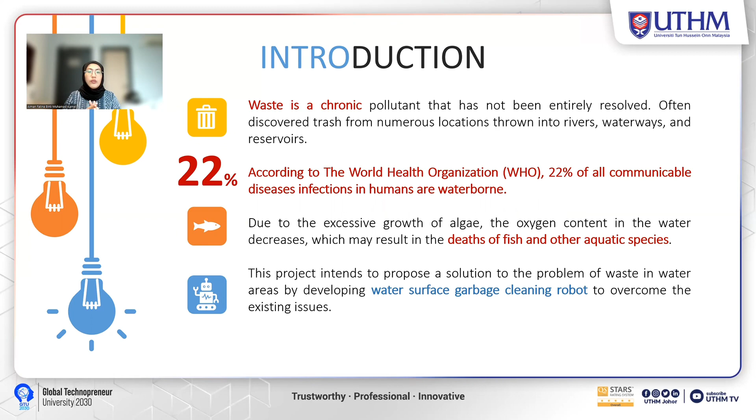So this project intends to propose a solution to the problem of waste in water areas by developing a water surface garbage cleaning robot to overcome this existing issue. For the problem statement, the first one is waste is one of the major causes of water pollution. The second one, high cost and high risk to use manpower.

According to the Straits Times, over 6.5 million were spent by the Malaysian government to remove pollutants from Sungai Kim Kim, where chemicals were illegally dumped. Also, according to Miss Marisa Perry, one of the volunteers for Econites, the Department of Irrigation and Drainage, DID, spent over 5,000 ringgit every month to collect and dispose of the rubbish. This is because they use

manpower. The third one, most robots use battery. And the fourth one is to increase the operation hours by integrating a PV panel. The objective is first to design a small scale water surface garbage cleaning robot. The second one is to develop the prototype of the robot. And the third one is to increase the operation hours of the system with an integrated photovoltaic system.

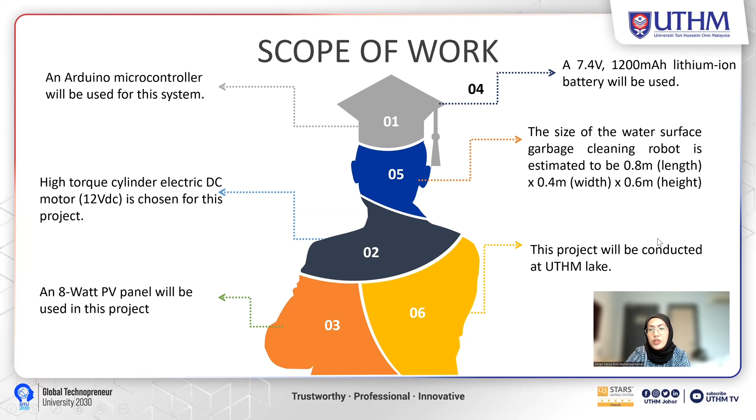For the scope of work, first we use an Arduino microcontroller, a 12 VDC motor, one PV panel, and a lithium battery. The estimated size for the robot is 0.8 meter length, 0.4 meter wide, and 0.6 meter height. This project will be conducted in the UTHM lake.

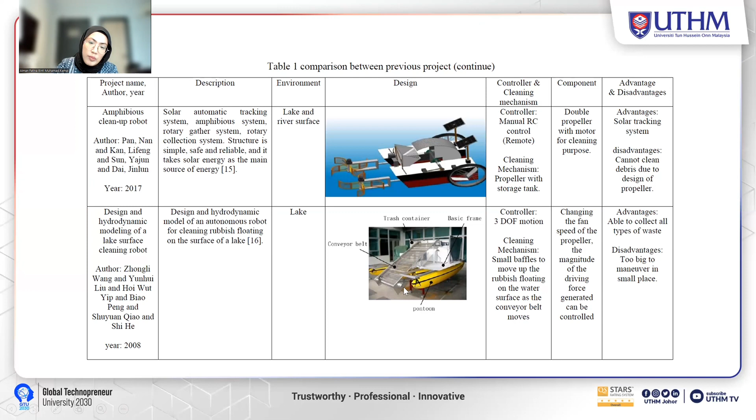Over here. The fourth one is design and hydrodynamic modeling of a lake surface cleaning robot. This is the same as the first prototype, which has a conveyor belt and a storage tank, but this structure is more stable, has a better chassis, and has a bigger space over here than the first one.

The two robots are actually the same, but this one is a modified one. It is modified with the YOLO V3 detection method. This part is using a robotic arm. The cleaning mechanism uses a robotic arm and a storage tank also.

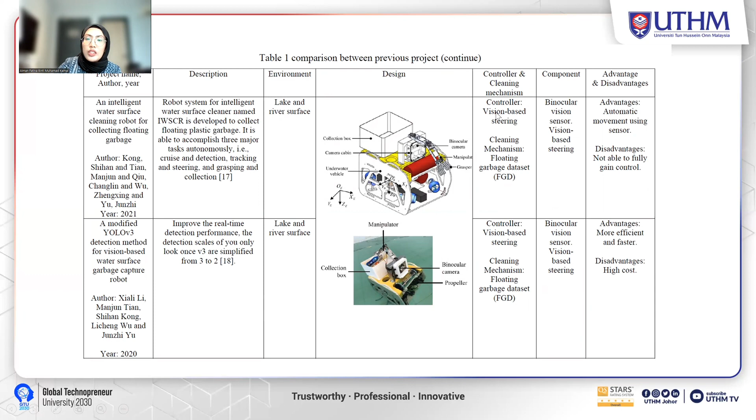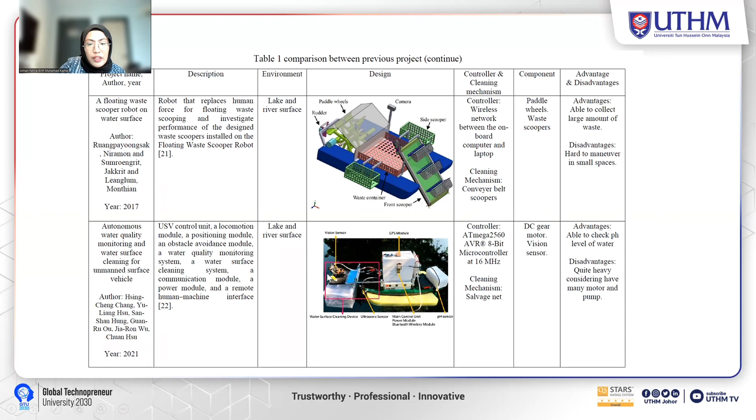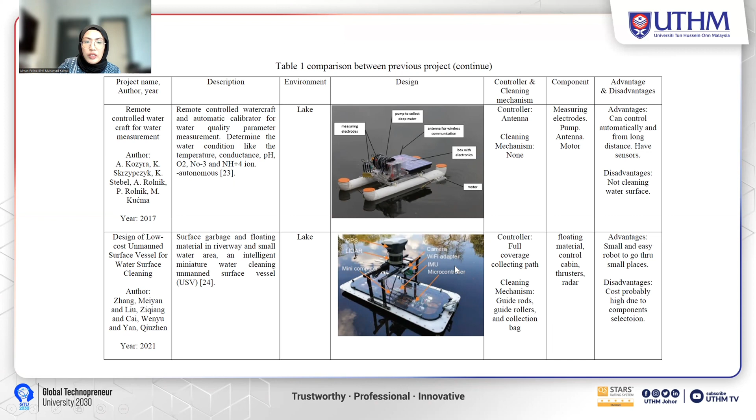Next, this is a remote control watercraft for water measurement. This is like the second prototype, which is used to monitor the water quality. There's no cleaning mechanism and the controller uses an antenna. And then this is a design of a low-cost unmanned surface vessel for water surface cleaning. The controller is full coverage collecting path, and the cleaning mechanism is a guided roller and collecting bag over here.

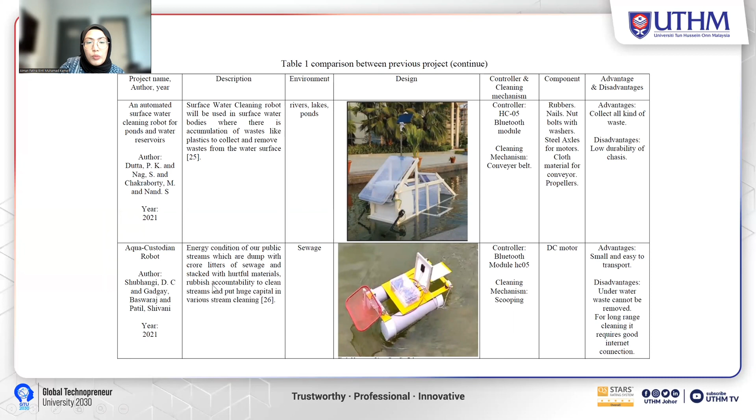And then this one is an automated surface water cleaning robot for ponds and water reservoirs. The controller is a Bluetooth module. Then the cleaning mechanism also uses, like prototype one, a conveyor belt. And then the last one is the aqua custodian robot, like this. This uses a scooping method.

For software requirements, first, I use Microsoft Word to do my report. The second one, I use Google SketchUp to design the robot. The third one is using Arduino IDE for the coding of the DC motor. And then the fourth one is Microsoft PowerPoint, first to do the circuit connection, and second to do this presentation.

For the upcoming project software requirements, I will use Fritzing. This will be more proper to construct the circuit. The second one, maybe using Proteus for simulation before the troubleshooting of the motor and robot. And the last one is Microsoft Project for a more proper Gantt chart.

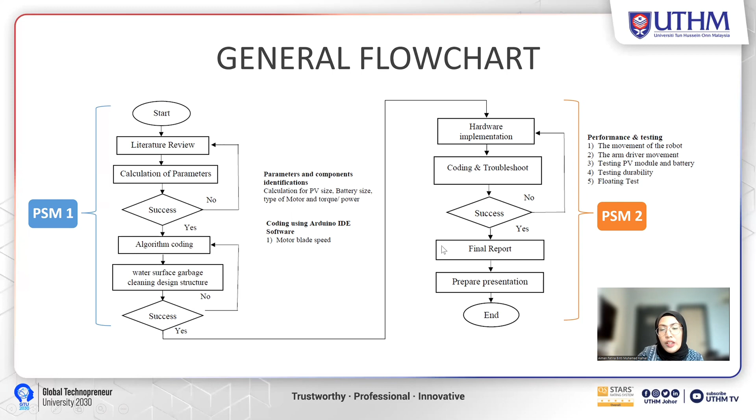For the methodology, this is my general flow chart. This is my current project, where I have already done the literature review, the calculation of parameters, the algorithm coding for DC motor speed, and lastly, the design of the structure of the robot. For PSM2, I will do the hardware implementation, coding and troubleshooting, and then the final report and presentation. So the main tasks I have done are the calculation, the coding, and the design. For PSM2 it will be the development, testing and troubleshooting.

For the calculation, first we need to determine the total weight, force, and average speed, so we can find the suitable components for the robot. First, the robot is estimated to be 6 kilograms, and the load the robot can carry is estimated at 1.5 kilograms, or 15 Newtons. The average speed of the robot is 0.5 meters per second.

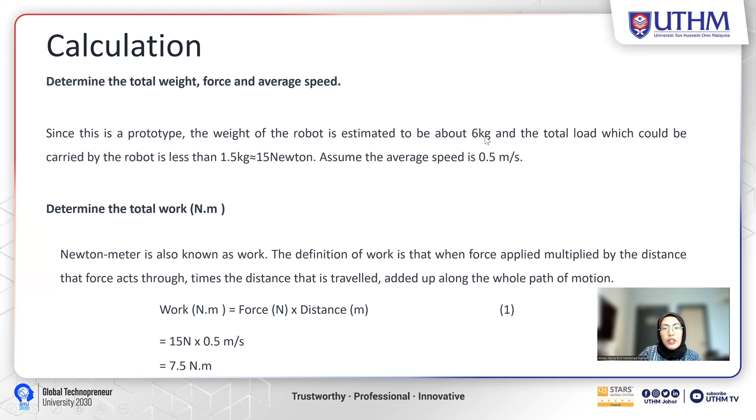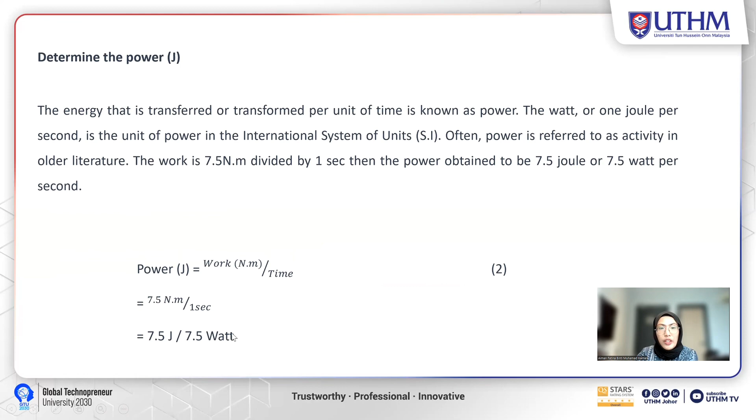So first we need to determine the total work. When we multiply 15 Newtons by the average speed, we get a total work of 7.5 Nm, and with that we can calculate the power. The power is work divided by time, which is 1 second, so we get 7.5 watts. For the PV panel, we use monocrystalline, because it has 20% efficiency.

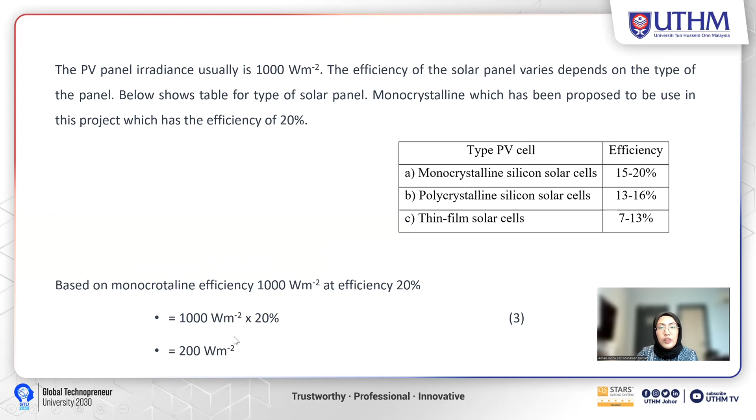So based on the irradiance, 1,000 irradiance times the 20% efficiency, we will get 200. And then next, the area for the PV panel to produce 8 watts. By doing the past calculation, we will get this 200 times area, we will get 8 watts. So how to find area? This is mathematical, so we will get 0.04 meter squared.

So surface area for the PV panel, which is the upper part of our robot, the top part. So the width times length equals area. So 0.1 times 0.4 meter equals 0.04, which is over here. So this is our surface area that we can put the solar panel and can produce 8 watts.

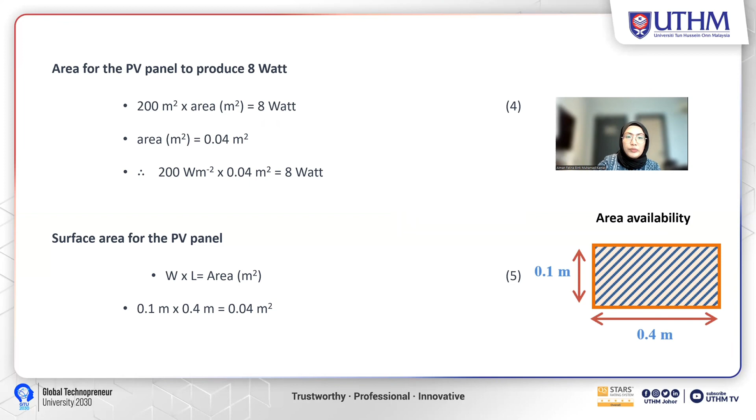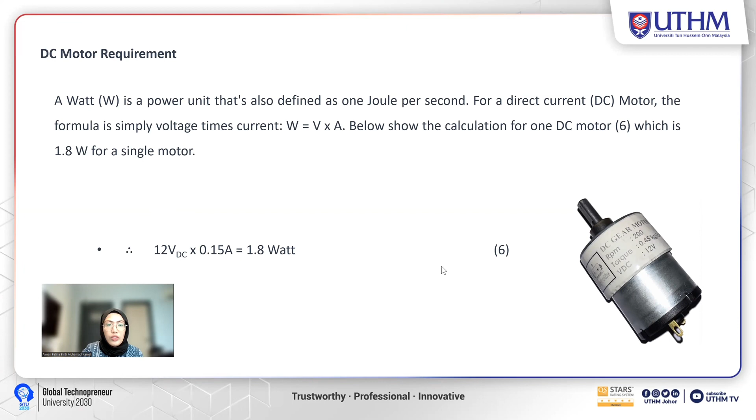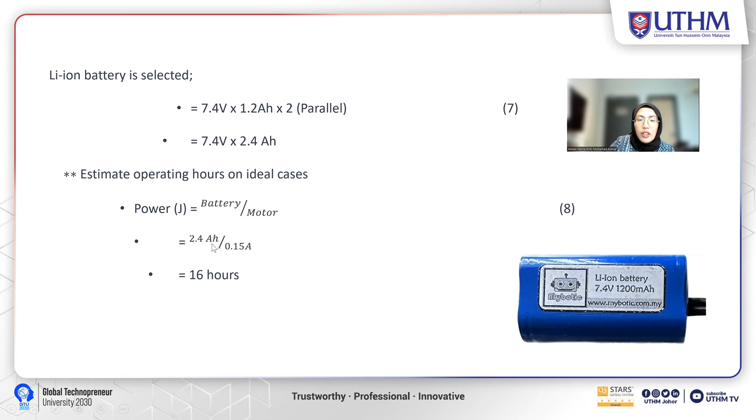So for the DC motor requirement, we gain this from the data sheet, which is 1.8 watts per motor. For the battery, we select a lithium battery. We use 2 batteries and put them in parallel, so we will get 2.4 Ah capacity. So estimate operating hours in ideal cases: we calculate it as battery divided by motor. This is from the data sheet, 0.15 amps. So we will get 16 hours.

For the motor to move forward, backward, left, and right, a motor driver is required. This project selected a 12V DC gear high torque motor because it has high torque and can support 0.5 kg of weight per motor. The project weight is 1.5 kg, but because it is aqua based, its weight will be less than it is on land.

So the driver is a dual H bridge motor driver which allows speed and direction control of 2 DC motors at the same time. The driver can drive DC motors that have voltage between 5 and 35 volts, and the driver has 2 amps current per output.

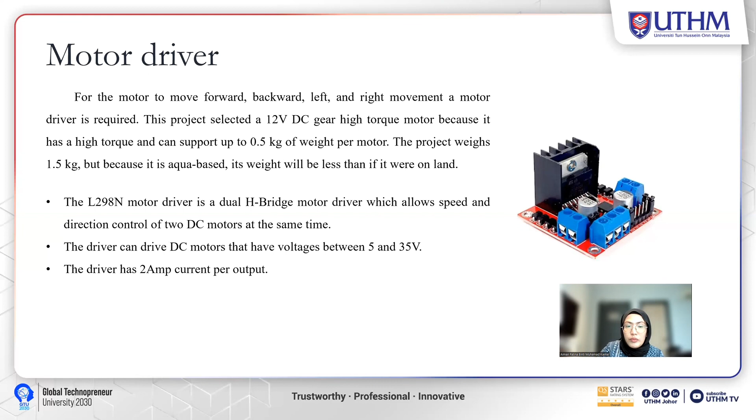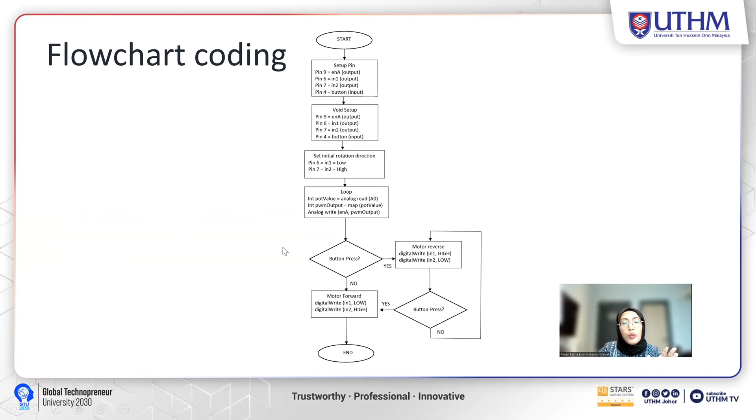Okay, this is the flowchart of the coding for DC motor speed. First we set up the pin. Then we set the output and input, and then we set the initial rotation direction, which is to move forward. Then we set the initial value for the potentiometer, which can go fast, medium, low. And then we also set the button. When we press the button, the motor will go reverse, and if we press it again, it will go forward.

So the design idea is based on 4 characteristics from previous projects. For the best structure, I chose the design and hydrodynamic modeling of a lake surface cleaning robot, because it looks more stable and has better material and a good chassis. It's stable because of the bottom area; it is big, so it is able to support all the components.

The next one is the wheel. For the wheel, I chose the floating waste collecting robot with water monitoring system because it has a good wheel base and can move easily with flappers around the wheel. This will make the movement of the robot more precise. And for the solar panel, I chose the development and implementation of a marine robotic algorithm validation testbed robot. The top of the surface robot is suitable to put a solar panel.

And for the cleaning mechanism, I use the first prototype, which is the aquatic multi-robot system lake cleaning robot. That robot used a conveyor belt with a net trapper. The net trapper was changed into a box to protect the microcontroller at the back of the robot, back here.

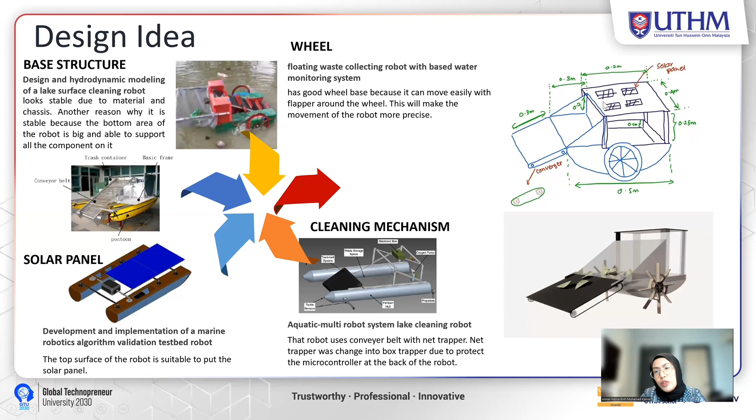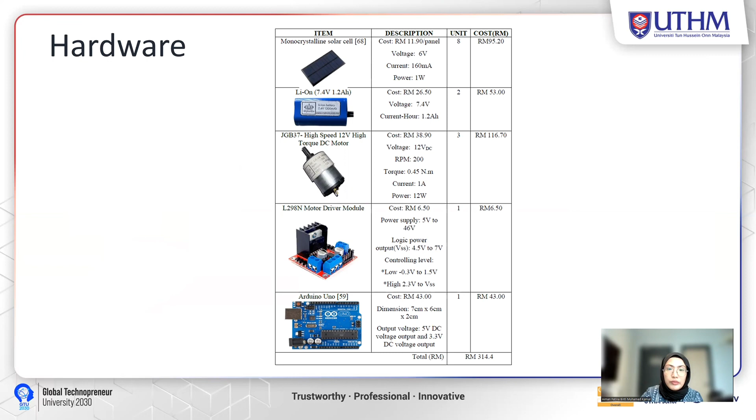So this is the circuit connection. This is for one DC motor. Okay, for two DC motors, we will have two connections here. Okay, this is to set the speed of the motor: fast, medium, and low. Okay, this can be pressed. So the button will change direction, reverse or forward.

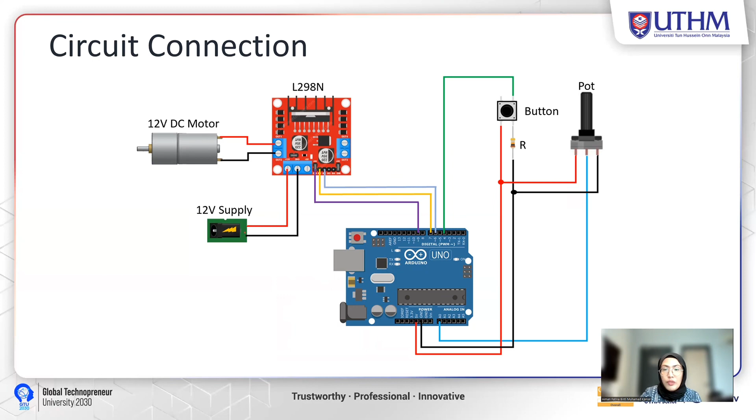Okay, to validate the parameters, we need to test the motor. We actually ran 6 conditions, but for 2 conditions I cannot take a picture because I need to stop the motor. First is no load, which is direct connection of battery and motor. The second one is with load, so we added a load to the motor. The third one is stall, where we completely stop the motor, and the fourth one is when it is connected to the motor driver. So we have the full speed, medium speed, and low speed.

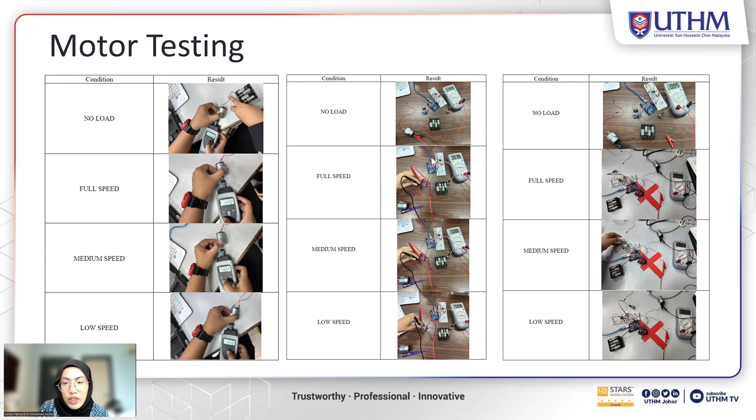First we test the RPM, using the tachometer, then we check the voltage, and then we check the current. So this is the value we have obtained from the test, which is at no load, 176.8 RPM, 0.05, and then 11.43 and 0.6 watt. This is calculated.

Okay. So after that we want to compare with the datasheet. The datasheet and the measured parameters can be slightly different, such as the RPM, which in the datasheet is 200 RPM, while the measurement is 176.8 RPM. The no load current in the datasheet is 60 milliamps, while the measurement is 50 milliamps.

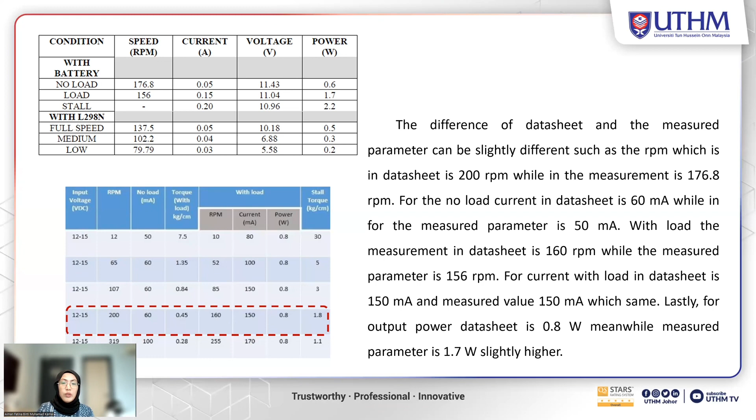With load, the datasheet is 160 RPM, while the measured parameter is 156 RPM. The current with load in the datasheet is 150 milliamps, and the measured value is 150 milliamps. Lastly, the output power in the datasheet is 0.8 watt, meanwhile the measured parameter is 1.7 watt, slightly higher.

For the design and material, all components and parts use different kinds of material. First, the conveyor belt: we'll use rubber belting so it can easily carry the weight. The body of the robot: we will use PVC, styrofoam, and lightweight material. And the third one is the wheel: we will use 3D printer material so we can customize the wheel.

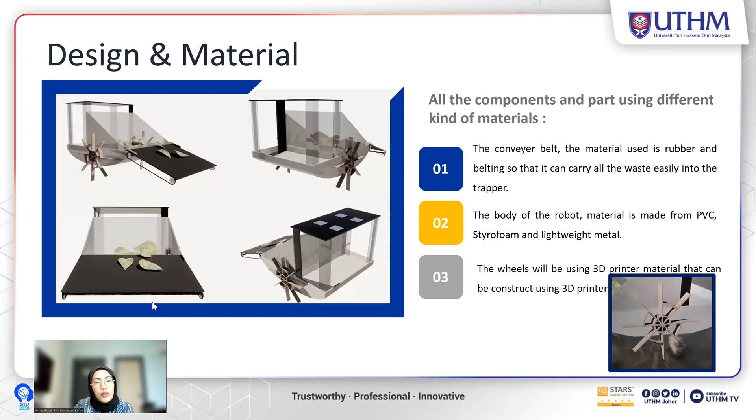Okay, this is the side view of the design. The back view, so we can put the microcontroller part over here, and then the front view. And then the top view, where I can put the solar panel over here.

For the conclusion, in this project, the hard work was given to build a robot that is able to clean the water surface from waste. From all the previous projects reviewed, all the data has been gathered, and it is very useful to build and design the robot. Next, in order to develop the robot, all calculations of parameters for selecting the components have been done. The next phase of the project is to create the coding and wiring for the DC motor speed and movement.

After that, the robot structure is designed using SketchUp software, and we are able to see the 3D model of the robot. Lastly, the preliminary result is testing the DC motor to know the specific parameter values of the DC motor in this project. So the total cost to make this is 314 ringgit and 40 cents.

Recommendations for project 2. First, we want to construct the water cleaning robot. The second one, do stability tests and floating tests on the structure of the robot. The third one, we will integrate the DC motor that we have done in project one into the robot. Four, we do troubleshooting and testing. After that, we integrate the solar into the system. The last one is introducing IoT to control the robot.